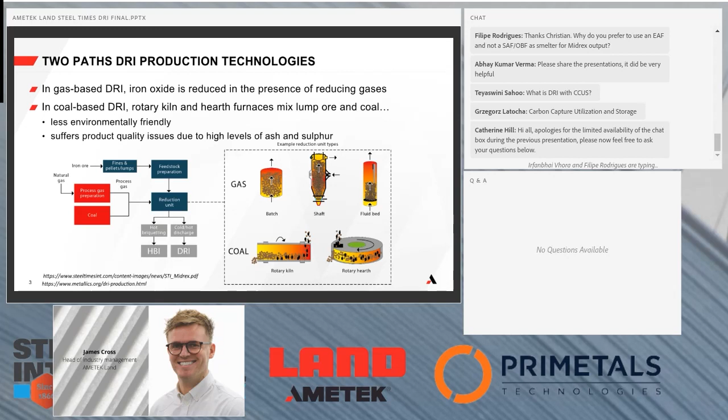So just zooming in on SMRs for a second. SMRs in DRI production, in my experience - and this is over the last say 3 or 4 years where we've started to look at DRI - you've typically got a bottom fired reformer in the case of Midrex, or you've got a terrace wall fired reformer in the case of a Foster Wheeler design that's used in other DRI processes.

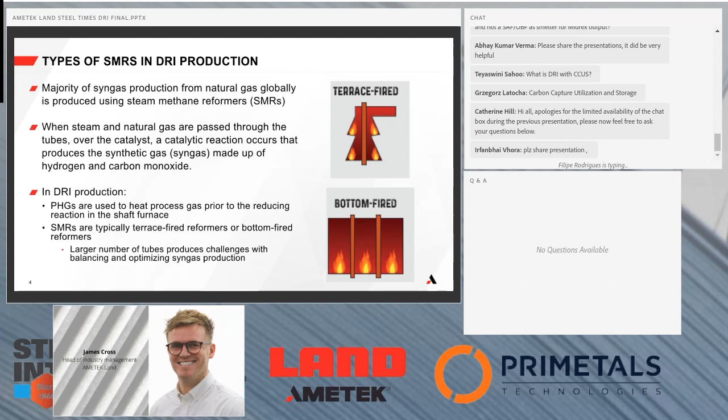So the majority of syngas production around the world comes from natural gas, which comes from the steam methane reforming process. In DRI, obviously there's a process gas heater route where gases are just heated, not reformed, not cracked before entering the shaft furnace. Or as Will and Christian mentioned, you could have a reformer where you've got this large number of tubes, large number of burners, a lot of things really that you want to know the temperature of, and that's where we come into the picture.

So just a quick recap on the process gas heater route. That's where you wouldn't have an external reformer. You've just got a process gas heater, oxygen addition before that goes into the shaft furnace.

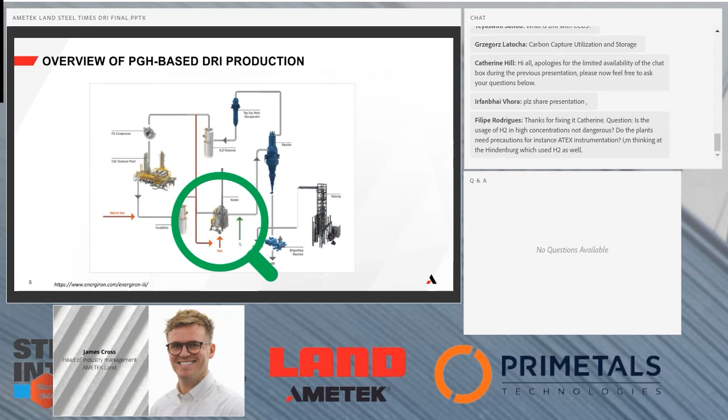This is obviously not in the Midrex process, but you've got, in this case, a terrace wall reformer supplying mixed syngas or mixed hydrogen and CO into, again, a process gas heater. So there's still a process gas heater after the reformer, before the reactor. In this case, we can supply our technology to both the terrace wall reformer and the process gas heater.

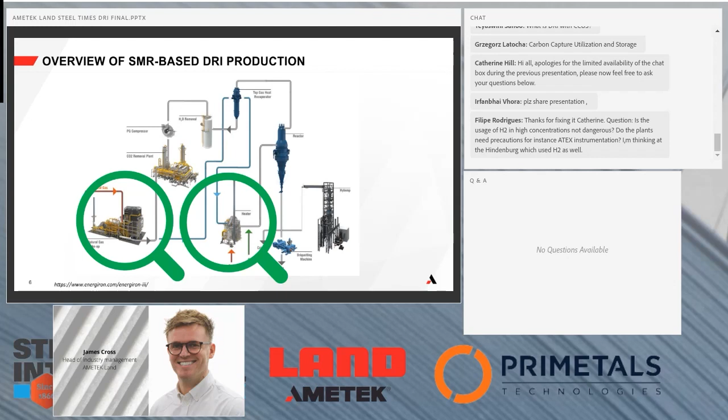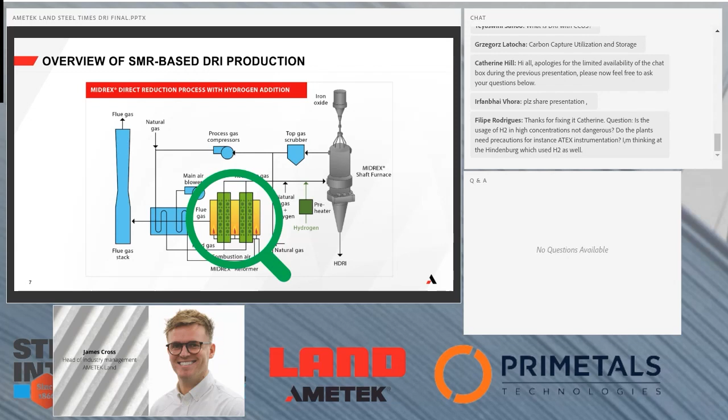In the case of the Midrex process, where you've got a bottom fired, typically pretty large reformer - when you compare these steam methane reformers to the ones that we might be familiar with in the refinery hydrogen world, the ammonia world, the methanol world, the CO2 production world - you know, these are big reformers, and it's really critical given the elevated temperatures that we get the temperature monitoring right.

So just recapping, how is thermal imaging used? I just wanted to recap on some of the advances in thermal imaging in the last few years.

So on DRI plants, and this is true across specific plants in the US, we've really supplied across the range. You might have a thermal imaging camera looking at flares, monitoring the pilot status or the main flare status. You might have thermal imagers looking at assets, so monitoring the outside surface of furnaces - that may be in the steelmaking plant as well, on ladles, gasifiers, anything where you're concerned about the refractory degradation or steel surface temperatures. TMTs that I'll come on to in detail. And then obviously the material itself, if you're concerned about the combustible material during storage or during transportation, then you can also use thermal imaging and infrared technology to monitor that.

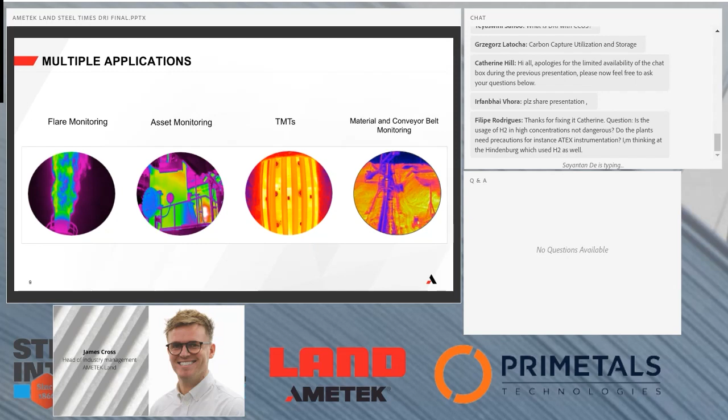So thinking about accuracy for a second - why is accuracy when measuring tube temperatures important? So either a steam methane reformer or a process gas heater, relatively simple equipment really, just very hot tubes, processing gas or reforming gas, and we're measuring the surface temperature of the tubes, and the accuracy is important.

Accuracy is important there because we operate in this specific window. If you're inaccurately high, so if your real temperature is 900 but we're telling you it's 950, then you'll have methane slip. That means the methane that you're trying to break down, trying to reform, is going to go into the header, and you're going to measure that in the gas analysis.

You're also going to have a margin loss. This is typically if you're an over-the-fence supplier, so if you're supplying syngas from outside the plant, you might have a margin loss, so you're producing less products than you need to. Or you're chasing false alarms, so you think you've got a problem.

I say this is probably the most common challenge that we run into. Your operators or your technicians, your inspection teams are chasing ghosts, really. They think they've got these high temperatures, but they don't actually have those.

Inaccurately low is probably more dangerous. That's where you might have safety issues, problems with reliability of the equipment, so tubes going really over their temperature because they're much hotter than you believe they are. You'll have margin loss there by reliability, and you'll also really significantly affect the tube life.

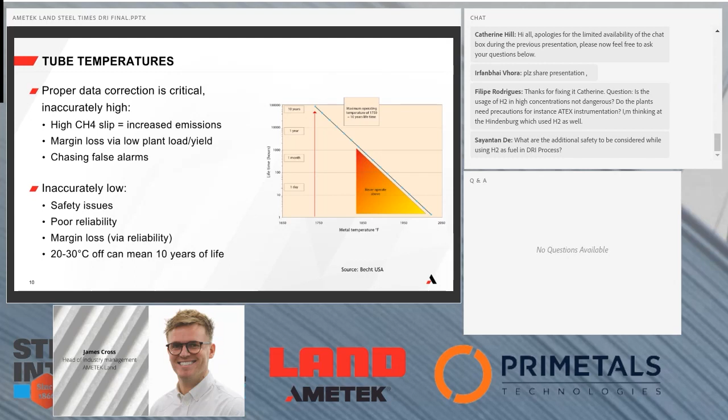So just a small over temperature, a small period of over exposure to higher temperatures, can take off 10 years of life in the case of 20-30 degrees C over your design temperatures.

So a couple of small case studies. One of our customers, Becht, who supplies services in the US to all types of fired heaters, actually identified around 12 times return on investment on their service, using infrared equipment to identify fired heater over temperature issues - they identified about this 12 times return on investment.

Using data from ammonia know-how that we work with in the ammonia industry on primary syngas reformers, they identified that around 22% of equipment failures cause shutdowns, and they involve the primary syngas reformer. More than 50% of those failures involve tube wall temperature excursions, so that's either during startup or during operation - a tube wall temperature excursion was responsible for shutting the plant down.

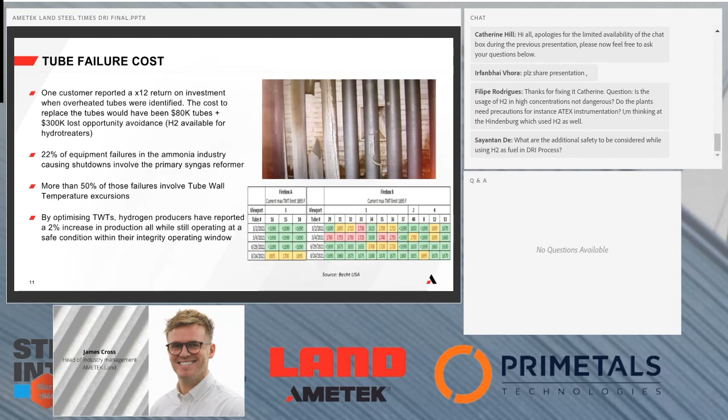So what we've worked on with all the hydrogen producers, syngas producers, is increasing that production while still operating in a safe window. So just a couple of the failure mechanisms that you might experience, you might be familiar with from steam methane reformers.

You might have your carbon formation on the inside of the tubes - that's where your mixture of catalyst and mixed steam and natural gas - you might have that caused by a low steam to carbon ratio, so your process gas is too rich. You might have heavy hydrocarbons in the feedstock. The catalyst activity could drop, so that means the inside tube wall and process gas temperatures increases.

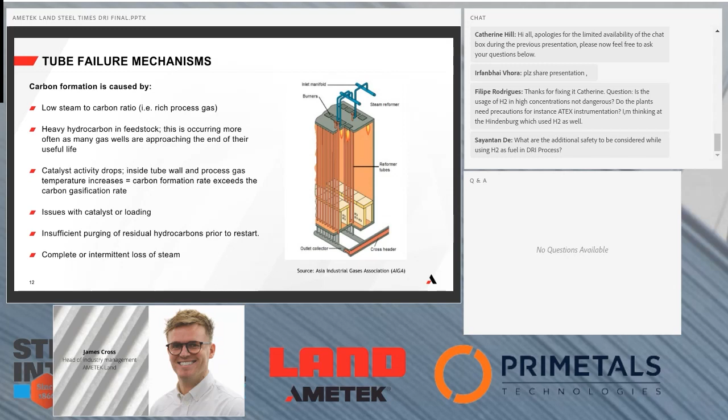Carbon formation rate exceeds the gasification rate, so you get formation on the inside of the tube wall and on the catalyst. You could have loaded the catalyst incorrectly, you could have fractured the catalyst, or it could be settled in specific voids. Insufficient purging of the residual hydrocarbons prior to restarting the furnace, or you could have intermittent or complete loss of steam.

So that type of carbon formation in a steam methane reformer - and on other types of heater actually - is normally visible in a thermal image through this type of hot band, and that's usually visibly apparent as well. And then once you have that carbon formation, the reduced inside, you get a reduced inside tube wall heat transfer coefficient.

You get reduced interpellet heat transfer coefficient, so less heat being transferred between the catalyst itself. Lower catalyst activity as the active nickel sites are covered in carbon. And then you get a pressure drop, you get an increase in the resistance to flow through the affected tube, decreases the heat sink available, and then further increases the tube wall temperature.

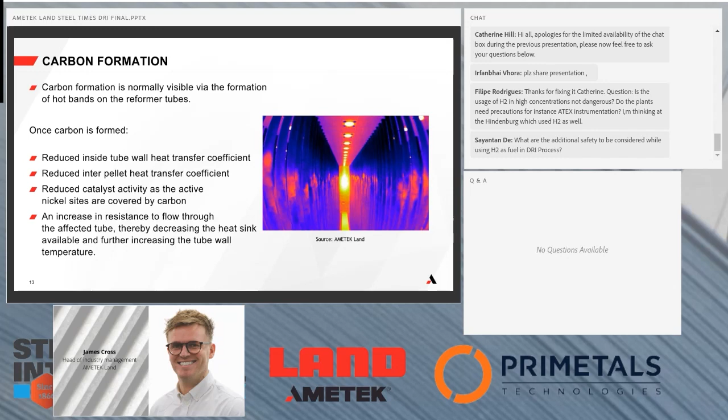So you can have this kind of runaway effect whereby your tubes start to overheat. When one tube overheats, it radiates onto other tubes, so you can get a kind of knock-on effect where you've got multiple overheated tubes.

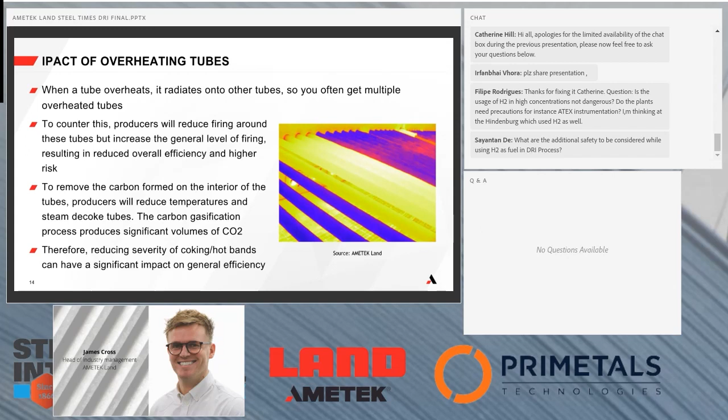What we typically see is producers reduce firing around those tubes, but to increase the general level of firing, you can increase firing in other areas, so you get a reduced overall efficiency. And then to remove that carbon, if you need to, producers reduce those temperatures, steam decoke tubes, and then you obviously get carbon gasification, producing significant volumes of CO2 in that case. So reducing severity of coking hot bands can have a pretty significant impact on your general efficiency.

So what we do in this industry is supply a range of instruments, starting with the very basic. This is a handheld pyrometer. This is something that an operator typically walks around the plant with, takes notes either on a piece of paper or on a tablet or a laptop, and records those values. They take these values typically without any correction factors, and then they'll go into the office after to correct those values.

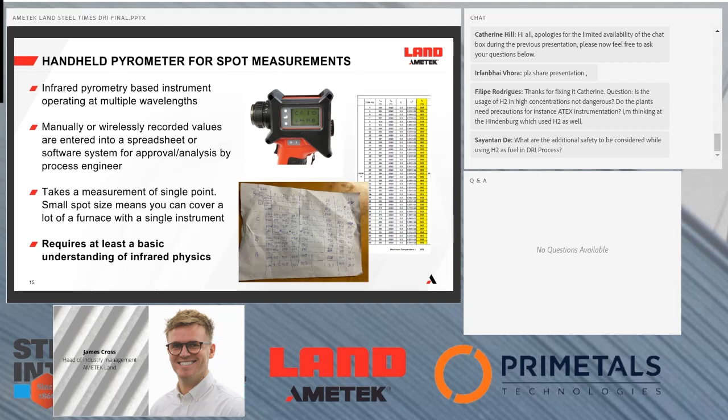We also pioneered a product called the Gold Cup. So on a steam methane reformer or process gas heater, if you're measuring using a non-contact method, there's a few variables that can cause errors. That might be the emissivity of the tube itself. It might be the background temperature causing errors, so you get background reflections off the tube onto your pyrometer from the tunnels, from the sidewalls, from the roof, from other hot tubes, and you can also have interference of CO2 or water vapor in the atmosphere.

So what we do is we actually hold this very long water-cooled probe against the tube surface to give ourselves a reference method. This is a reference temperature that we can use to calibrate our thermal imagers or our pyrometers. So your pyrometer is going to give you a single tube measurement, but you can obviously measure all the tubes that you can see, and your Gold Cup is going to give you a reference measurement that you can use to calibrate that imager.

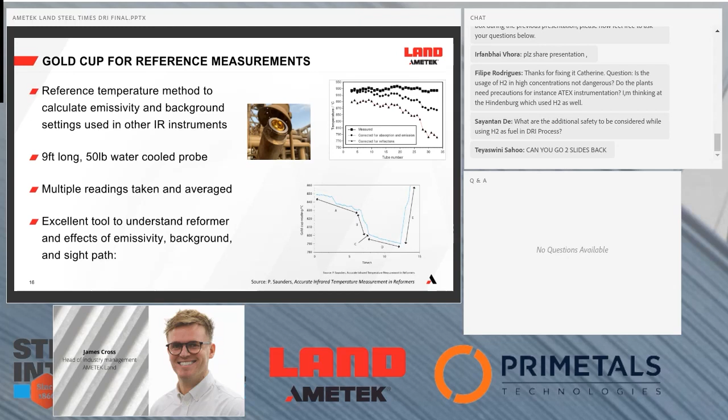What we've talked a lot about in this space is thermal imaging. So what a thermal imager enables you to do on a large process gas heater or steam methane reformer is to measure multiple tubes with a single imager through a peep door or through a custom port. That's kind of automating the tube metal temperature measurement process. And we can do that with certified imagers on the left, 3.9 micron imagers in the middle, or high definition imagers that you can see on the right.

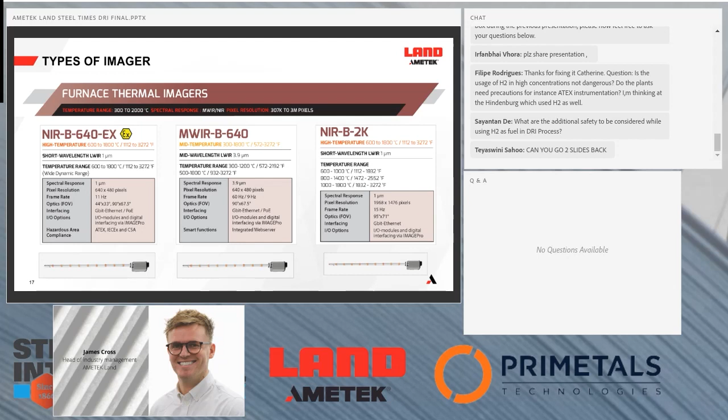The high definition imager is particularly attractive to this space because unlike some of the petrochemical producers, we're finding that DRI producers are happier to go with non-certified equipment, and that's based on probably some of the experience in the steel industry. But really, we don't need to have certified equipment around a firebox that's running at 1050 degrees C. So we've designed a range of housings for this imager.

The key thing really to note is that the electronics are in this housing here, but the actual lens is on a borescope. That means that we can get the lens really in the furnace. We can cool that borescope and still get the benefit of a really wide angle view inside the furnace.

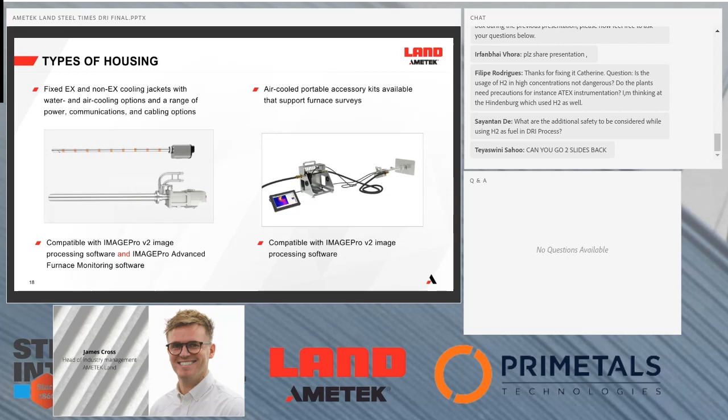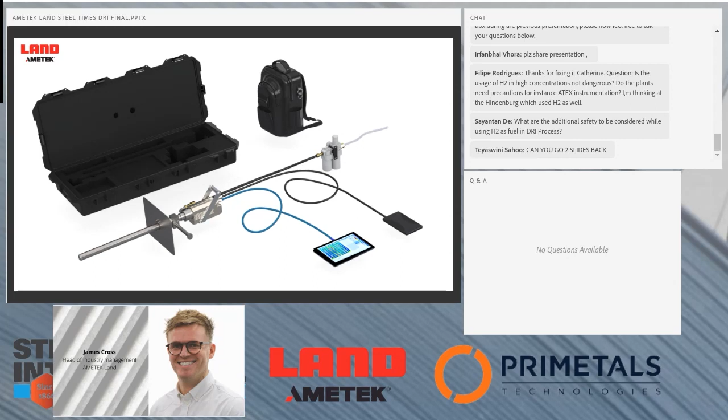So we can do that on a fixed basis. We can cool that with water or with air, or we can do that on a portable basis where you've got a borescope with a kit essentially that enables you to carry that round the reformer, open your peep door, take your measurement, record those video files on the tablet, and then go back to the office to review those video files. So that gives you some kind of versatility with the imager.

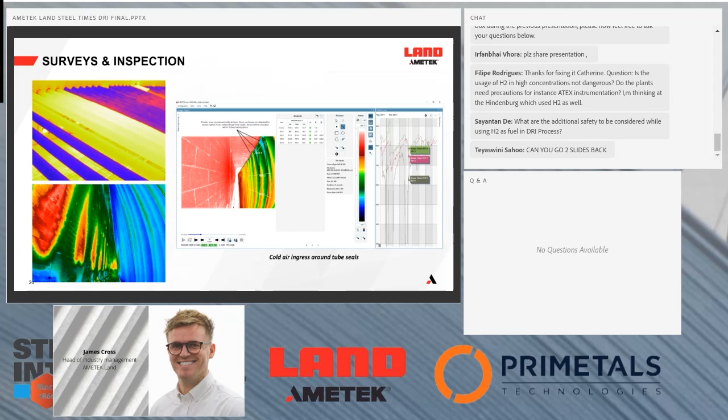Some of the things that we found is particularly useful in this space: you can see if you're measuring upper levels, you can often see cold air ingress. You can really see the uniformity of the tubes around the furnace, and then create thermal maps of the reformer to give yourself an understanding of the balance of the reformer. You can do that on a periodic basis with that tool. You can also see the temperature gradient of multiple tubes vertically, so we can see how the reaction is happening in that tube.

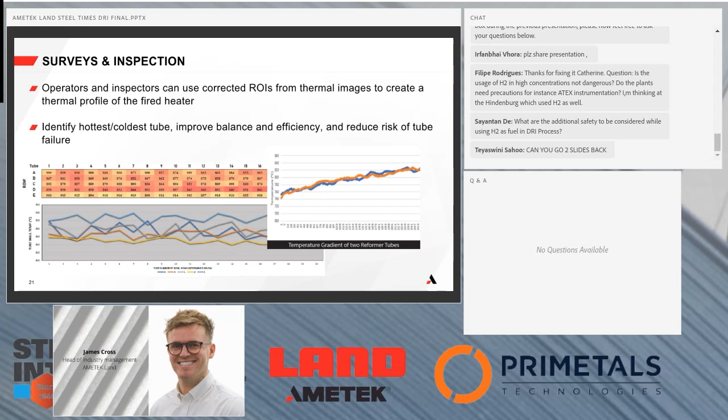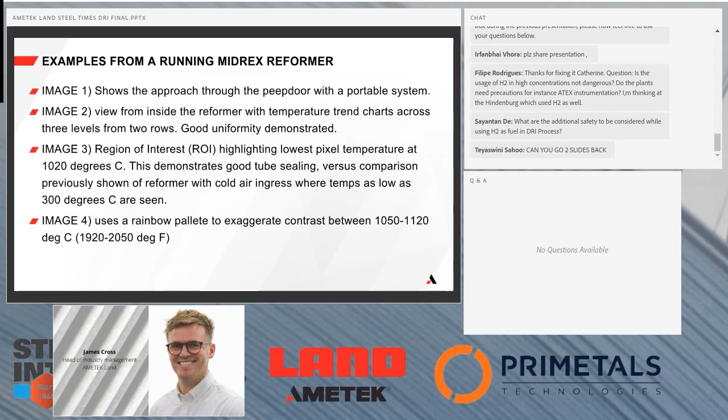So I've got some images of a running Midrex reformer, and thank you to Will for the kind permission to use these. This is actually using this portable system with a view to demonstrating the value of a fixed system. We took the imager through the peep doors. The images, as you'll see, show some pretty interesting stuff. This is just basically showing that we used the very small peep hole on the Midrex reformer to put this borescope through.

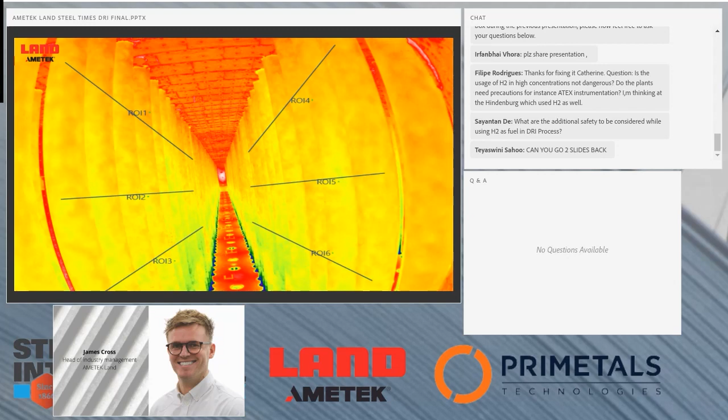The second image shows you how we determine the tube temperature. We actually put these regions of interest at 3 levels: top, middle, and bottom. This collects essentially a line of information across the length of the firebox, and we can use that data to show the temperature uniformity of those tubes as you go towards the center of the furnace, which is actually quite good for such a large reformer.

In some of the industries we've worked in, some sites I saw in very hot regions in particular would struggle to get this type of uniformity. With just a 2-minute analysis, you can really see and monitor for peaks, troughs, and elevated temperatures, just with a simple analysis.

We can also look at the tube seals. Again, a very quick analysis, but you can see here this is the minimum temperature measured in that region of interest. So I can determine with a quick analysis that there's no real major problems with the tube seals. That would be very obvious - if there were a problem with the tube seal or cold air ingress around the tubes, you'd see temperatures way below 1020, something like 300 or below. So we're able to make those determinations.

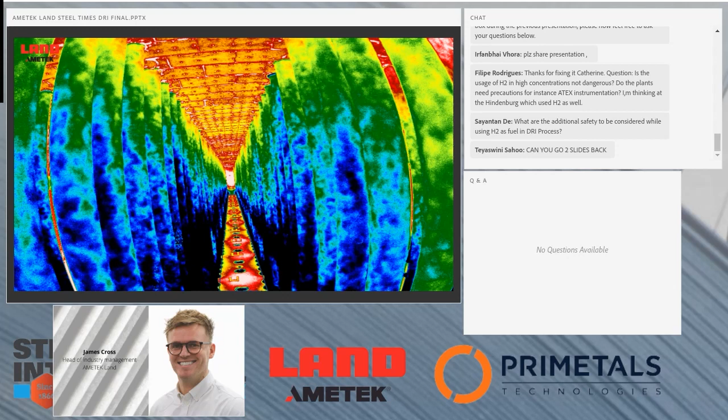What we can do is highlight certain temperature ranges - this is highlighting about 1050 to 1120 degrees C. We can really see how the tubes are balanced, see high contrast across the tubes, and see how things are even on the floor. We can see how the radiance is affected across the length of the firebox and how that might be affecting tube temperatures. But in this case, unfortunately for the presentation, everything in the reformer is running well and nicely balanced, so there's no major issues to report from this one.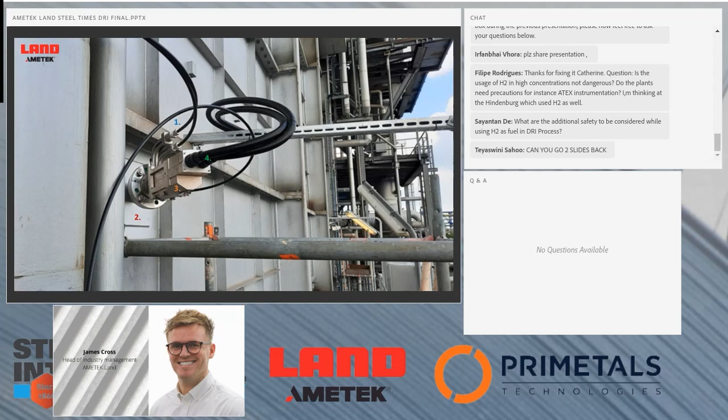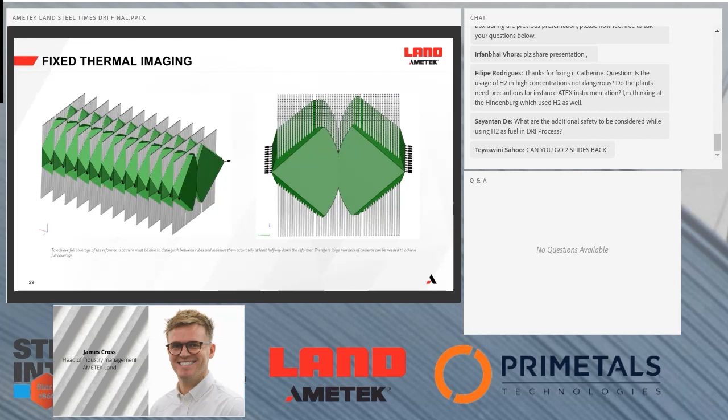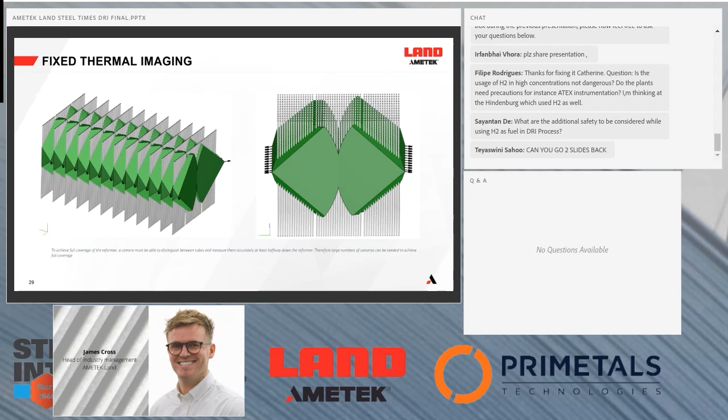We've determined the angle of that installation based on a field of view analysis and a consultation with the customer to determine the optimum placement of those cameras. These reformers are very large, so fitting an entire firebox with cameras would be a pretty big number in order to automate this TMT and furnace monitoring process. So it's generally a consultation where we say there's a requirement for say 6, 8, 10, or 12 cameras, and then we determine the best place to put them to get the most value from that.

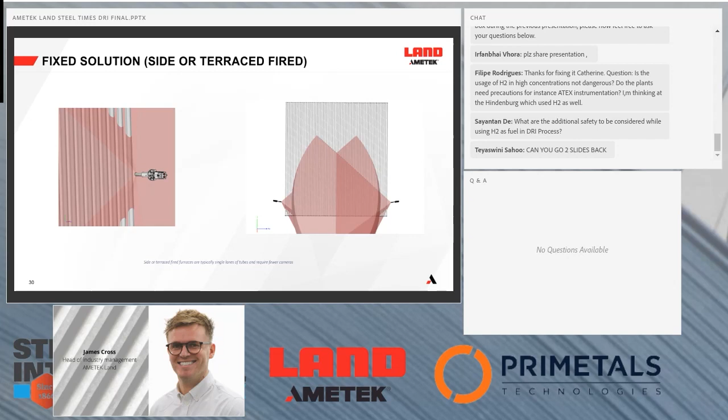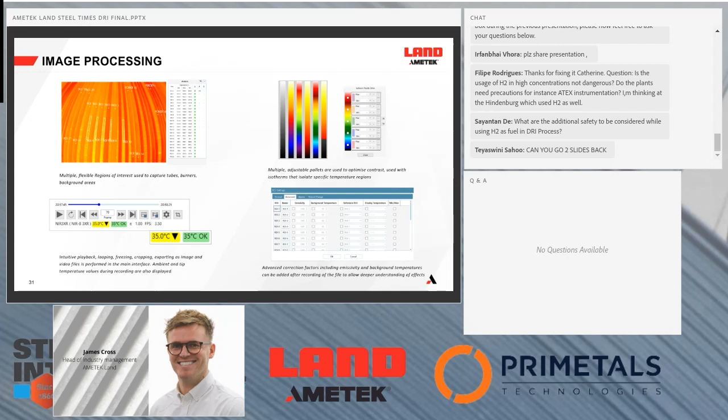We might decide to look at the bottom of the tubes. In the case of a terraced wall reformer, we might look at the bottom because that's where we think the hottest temperatures might be. In the case of a Midrex reformer, we might look further up the process, given that's a bottom-fired process. We've developed a ton of software features, not just to collect the information but to correct it - we can correct for emissivity and background using real live data. We also monitor the temperatures of both the camera and the tip of the camera during recording, so we're making sure we're monitoring not just the furnace, but the health of the camera itself.

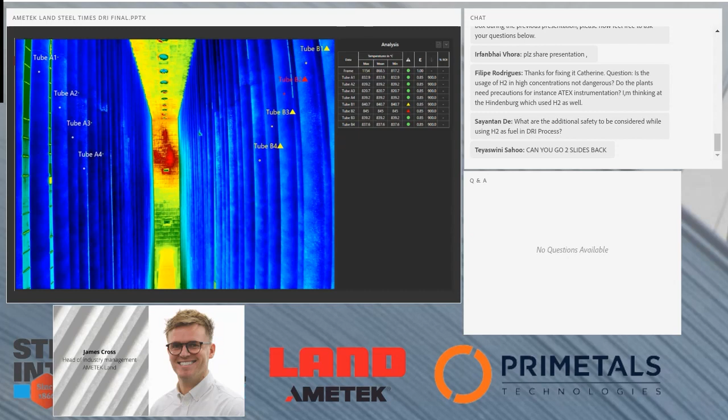Here's an example on a large steam methane reformer in Qatar - this is just a sample image - where on a long-term basis we monitored every single one of these tubes with only 2 cameras. With the camera on one side, you could measure I think 36 tubes on each row, and the camera from the opposite side would measure the first 36 tubes on each row from the opposite side.

Coming back to the definition quickly, you've got a real advantage in terms of pixel resolution when it comes to high definition imaging. This is the same image, but with 3 million pixels versus 300,000 pixels. This gives you a good idea of how target sizes and pixel resolution is important in thermal imaging.

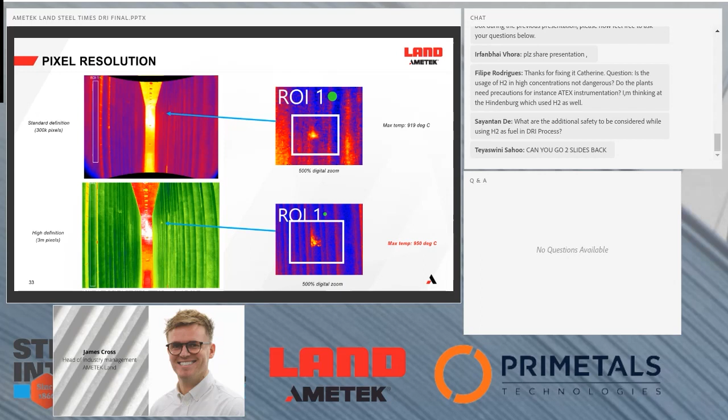With a smaller pixel size, we're actually able to detect higher temperatures. So if you were to determine this tube temperature, the temperature of this hotspot, with a lower resolution imager, you might actually miss that it's actually up at around 950 degrees C, not down at 920 degrees C. That's why in thermal imaging, target sizing and spatial resolution is a pretty important concept.

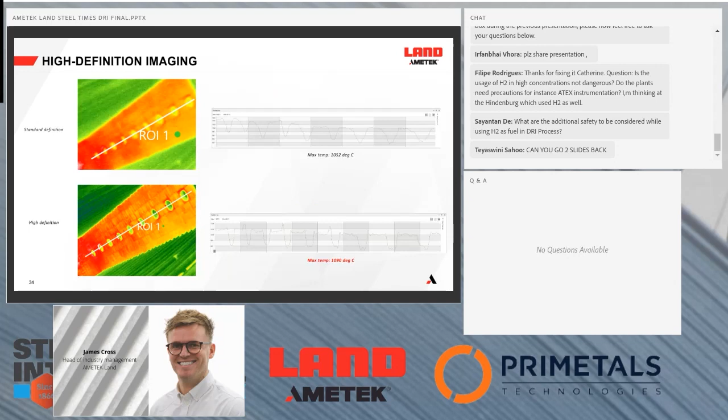The same with monitoring the burner temperatures. We get a difference of about 40 degrees just based on the definition.

Isolating certain temperatures, we can also see the direction of the flame, or at least the flame impingement or flicker on that back wall. And we can see that does have an impact on the tubes themselves, as the tubes on the right-hand side are hotter than the tubes on the left-hand side.

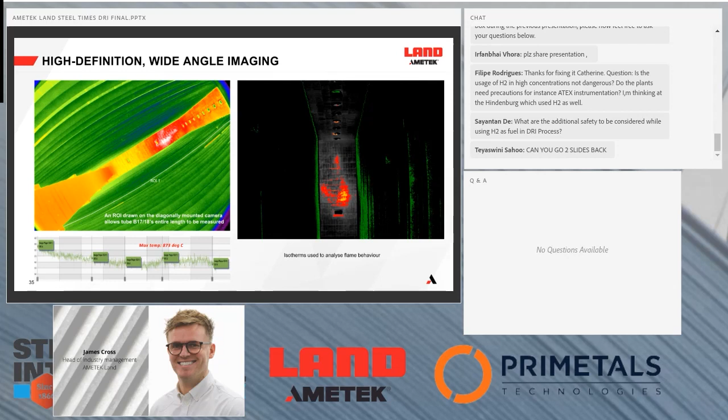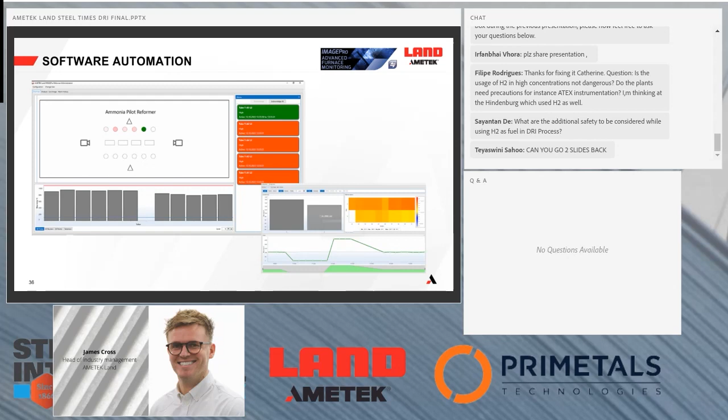Long-term, something we currently do is build this into real-time dashboards to give our users an idea of the real-time tube temperatures, the alarm situation, the trends over time, comparison of rows to each other, and this thermal gradient to give you an idea of the real temperatures.

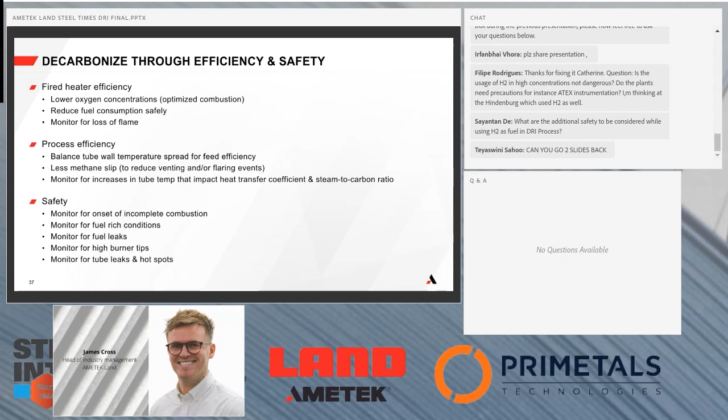Looking at efficiency, by increasing efficiency, we can lower oxygen concentrations to optimize the combustion, reduce fuel consumption safely, and monitor for loss of flame. On process efficiency, if we're balancing tube wall temperatures, we can increase the feed efficiency, lower methane slip. We can monitor for increases in tube temperatures, and that impacts the heat transfer coefficient and steam to carbon ratio. And then we can do all sorts of things for safety as well.

I've run over slightly, so I'll finish there for questions. Again, just thank everybody for listening and the great presentations previous to now.